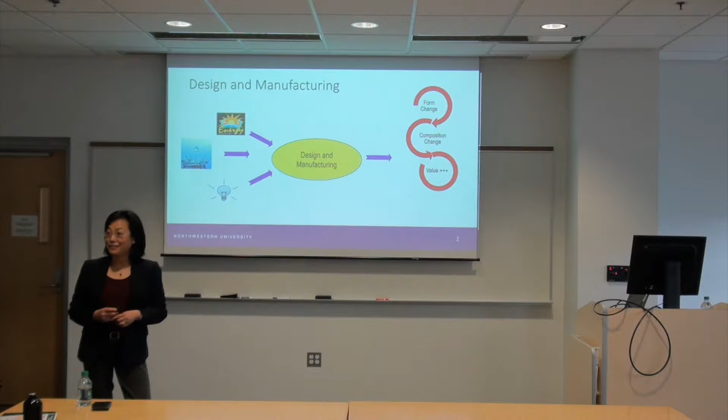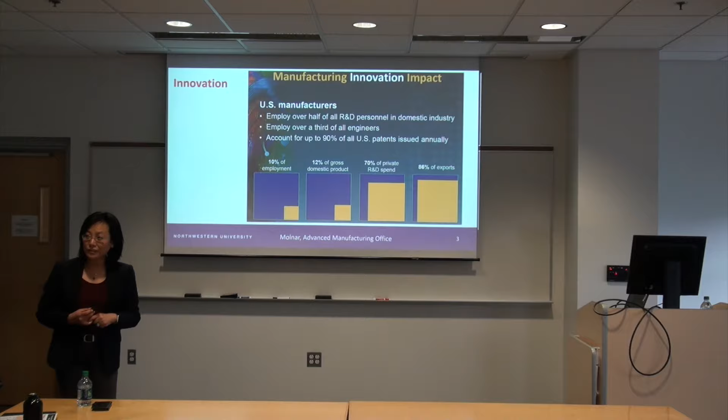If you look at, for example, this is from the Advanced Manufacturing Office—a lot of employment, PhD employment, R&D, particularly half of that is in the manufacturing sectors. So for this crowd, I don't think we need to emphasize too much—everyone understands the importance of that.

In our lab, it's co-directed by me and also my colleague Kornel Ehmann. We have three strategic areas.

One is looking at flexible fabrication processes. The second is quite some work looking at scalable manufacturing processes for surface engineering. And the third is digital manufacturing cyber-physical systems.

Each of those three requires a little bit different in terms of students' background. For flexible manufacturing, let's talk a bit faster. What we're doing—a lot of work I'll talk about today—is looking at double-sided incremental forming process, which is a dieless forming process to make sheet products. Associated with that, we also have electric-assisted ones to enhance the formability of the metals.

The second category where you look at flexible manufacturing processes is, obviously, additive manufacturing. Here we made our own instrumentation called the additive rapid prototyping instrument. It has very little resemblance to commercial ones, because we want to tap into the system such that we can change the control, change the flow rate, change the laser power, and monitor that, as well as do in situ metrology.

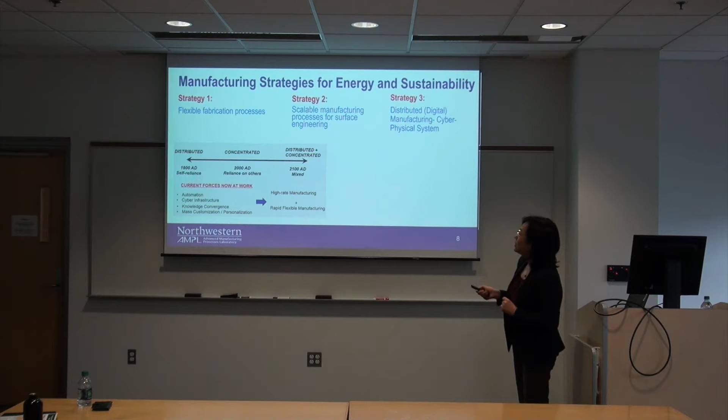Going to the future, particularly with additive manufacturing coming in and many other flexible manufacturing processes, smart robots coming in, the mixture is going to be high-rate manufacturing plus rapid flexible manufacturing, what we call it. We actually wrote this paper quite a few years ago, before distributed manufacturing became a concept adopted by the majority of people. Now when you talk to, for example, DoD, they are really looking into the distributed manufacturing model, and how do you connect these different things together.

One of the projects we're working on, also with Champaign colleagues, is thinking about all these different capabilities, and how we create a kind of internet to bring all these different resources together. You can also manage the servers, do routing optimization, and put everyone on the same platform. So when you have small businesses here and there, how do you get their extra manufacturing capability onto the same platform, where you can also do certification and resource management? That's one aspect of the cyber-physical system.

The other aspect of the cyber-physical system is predictability. When you do computational modeling, how do you know that the part you are making has exactly the quality that you intend?

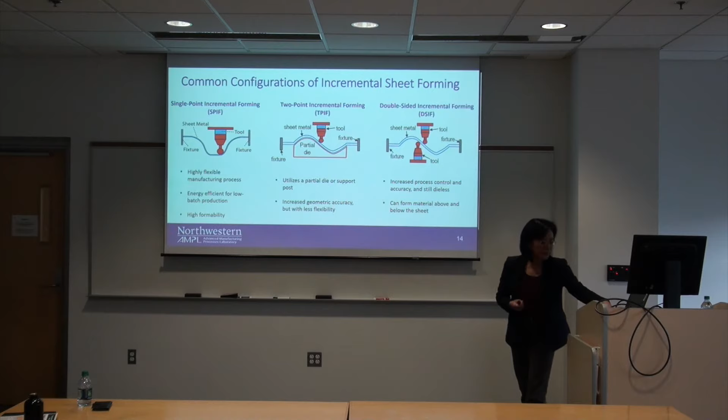Okay, so we have a video, it's on YouTube. Let's see whether it's working. Sorry. I don't know whether the sound is working or not. Maybe I can try that. Maybe it's because of me. Okay, you don't get the sound.

So Neil did a really nice explanation on top of this—another PhD student of mine—so you have to bear with me and just listen to me.

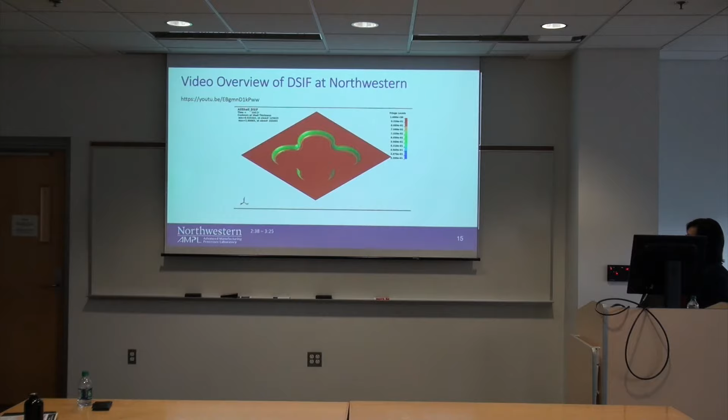Everything looks good, and now we're ready to manufacture the real product. Lubrication is essential to prevent tool wear as well as to achieve an excellent surface finish.

During forming, we monitor the forces of the tool tip, as well as the current progress of the tool path.

Here's our finished part, and a close-up of the surface finish, and a few other parts that we made.

So this is a flange. For more information, check out our website. And thanks for watching.

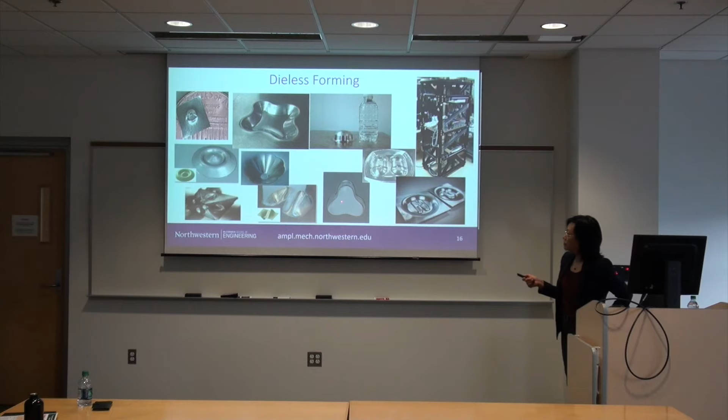So here is a collection of some of the parts that we made, and you can really go dieless. That's our whole concept, and you can also create flanges because many of the sheet metal parts need to generate an assembly for other purposes.

So you can do the laser cutting, and then you can do that. Now the other thing which is difficult is actually generating something like vertical walls and those features. You can scale it up and down, so the smallest one that we made is just the size of a pen.

When you talk to industry, they say geometry accuracy is the number one important part. For people who have worked with metals before, how many of you here have worked with metals before? Okay, all right, just about a third.

The part was formed to be a pyramid part, and as you can see, after it's clamped, it was pretty good. Now we try to take the part outside of the machine, and it becomes what I call a potato chip.

It's a metal potato chip, and this is really inherent because of the spring back, the elastic recovery in the sheet. So after you release the clamp, the part is totally unrecognizable.

How do you solve this problem? The way that we did it: we actually put the part back, assuming the recovery is purely elastic, back into the clamp, and then we went through the thermal annealing process, stress relief.

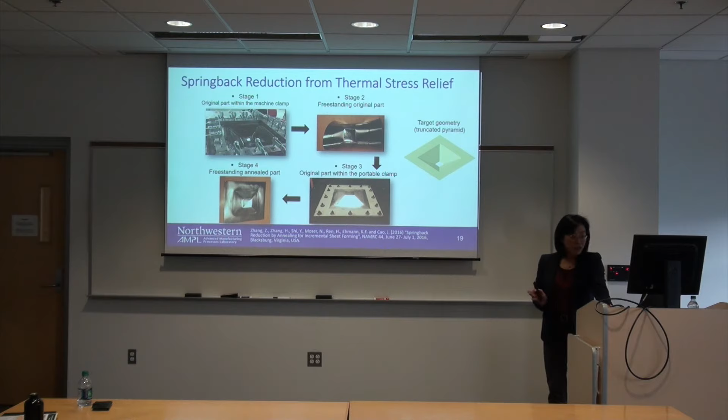And then once you do that, after you take out the part, you see it's pretty good. So we solved that one. Now the goal is, these are the different ways you can try to get to the right temperature for thermal annealing.

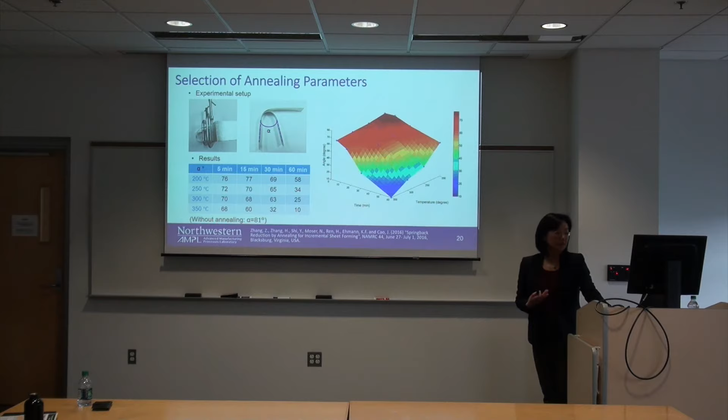That's not that difficult, because if we just assume it's purely through the bending process, you can actually get those parameters pretty easily for different materials.

But then the key part is during forming, you need to form to the right geometry. In the video you've seen with the DSIF, you actually have two tools, one top, one bottom. That's a simulation model, right?

And then you go from the top and gradually move down. The tool each time moves a delta Z going down, gradually moving down, and you see the part gets deeper and deeper.

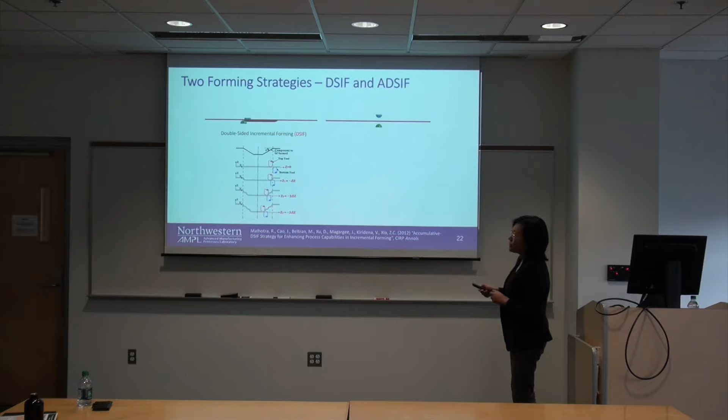Now the problem with this is that you have local deformation, and what happens is when you have a force acting on the part right here, the previous part that you made is also subject to a force, so you stretch it a little bit.

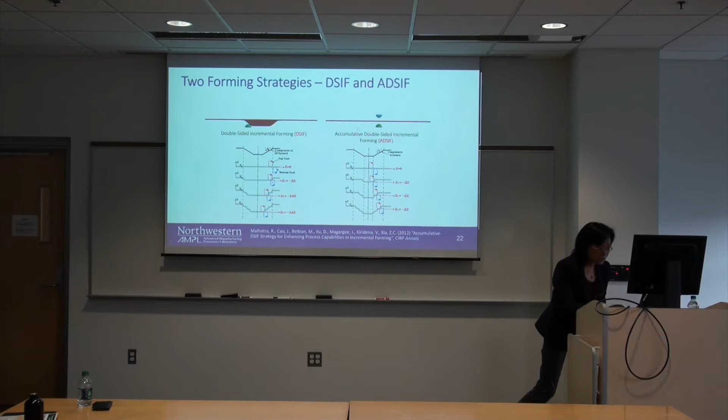For simple geometry, it's easy, but if you have a complex geometry, it could get tilted or deformed some other way. So the process that we actually developed here is really interesting.

Instead of going from outside to inside, this process starts from inside and then pushes the tool towards the outside. You see that the tool always stays on top of the clamp and never moves down, while the part actually gets deeper and deeper.

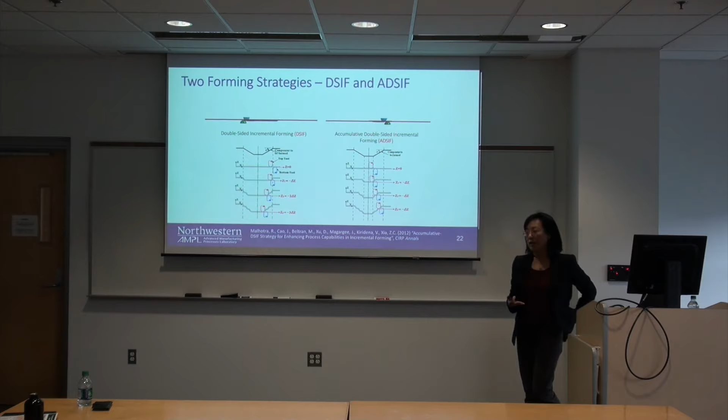You see that? This is interesting because now you have local deformation happening right here. And because I'm always working with virgin material, which has not been work hardened, I can have better control over the displacement because all these material properties are kind of consistent, and then I can go there.

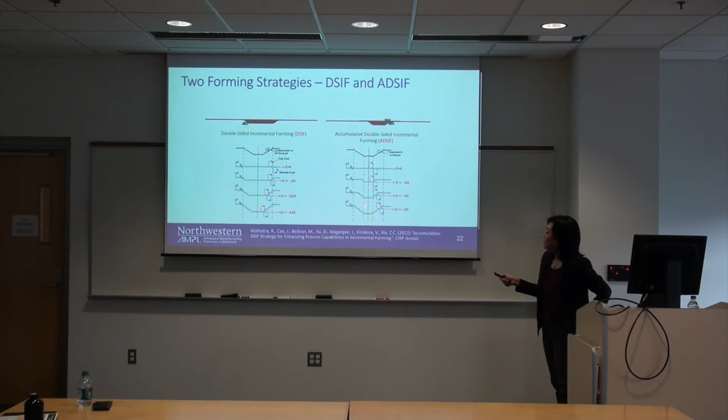So nevertheless, if you look at the plot, when we look at the shape deviation versus, for example, different squeeze factors between the tools, it's a kind of busy plot, but bear with me and let me explain. This is shape deviation in millimeters. Let's just take a look at this red one.

Forget about squeeze factor, we're not going to talk about that. But just look at the square ones.

The gray one right here is the DSIF, which is a traditional one - our group actually started this - when you have the outside going to the inside, with delta Z about 100 micron. And this is a part that we made. If you compare the part, it's not just a simple part, but actually has features in there. The average shape deviation is about 3 millimeters if you do that process.

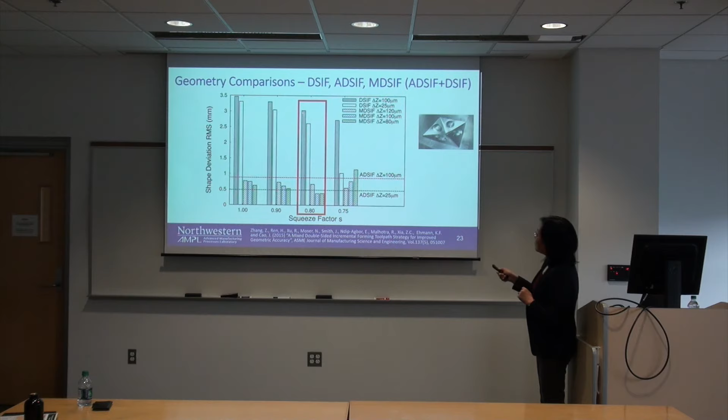Now you can change the delta T to be 25 micron, and then you can reduce the shape deviation.

Now if you do ADSIF, from inside to outside, with the tool always at the normal, the initial clamping position, the delta T is 100 micron, you have shape deviation just below 1 millimeter. If you go even better, with say 25 micron, you can go very low, about 0.5 millimeter, which the industry starts to take as okay. They actually want probably even less than that, 0.2 millimeter. So if you go even lower, this starts getting ridiculous - 25 micron, if you get even lower, it takes forever to make it.

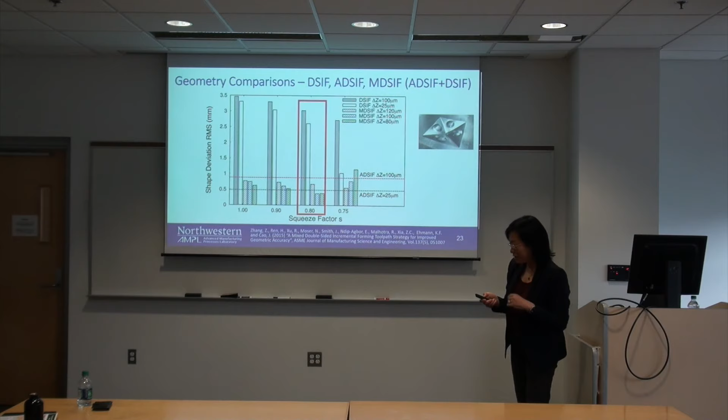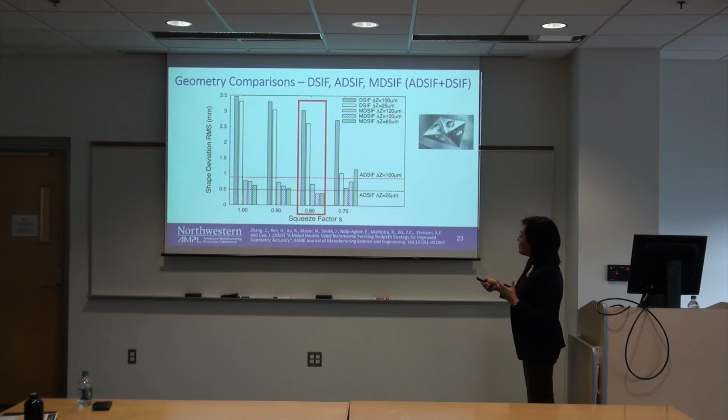But the process - you see there are two additional bars right here. What we did is we call it MDSIF, mixed double-side incremental forming. We used a delta Z as 100 micron. We do ADSIF first, basically from inside to outside first. Then the second time we still use a delta Z as 100 micron from outside to inside again. You can think about the machining process - coarse machining and fine machining, or shaping - similar concept. So with this one, even though we do it twice, which means the time needed for the mixed one is about twice as much, but still it's about half of the other, and we can get better geometric accuracy.

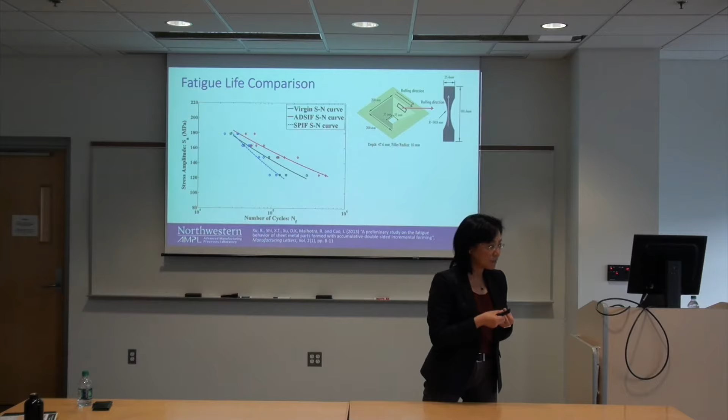We actually have a paper on this, which I didn't include, but nevertheless what you can imagine is here you actually have local voids developed, and fatigue is very sensitive to voids. That's when you have this kind of reduced fatigue behavior. Now with the ADSI, because you are putting the compressive stress through the thickness, you're closing those voids and that helps get a longer, better fatigue behavior.

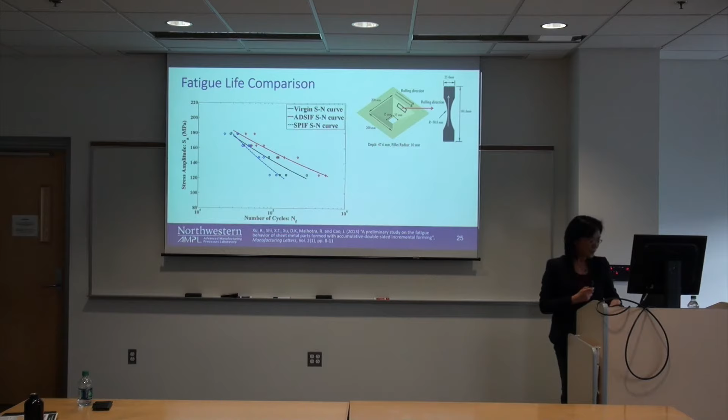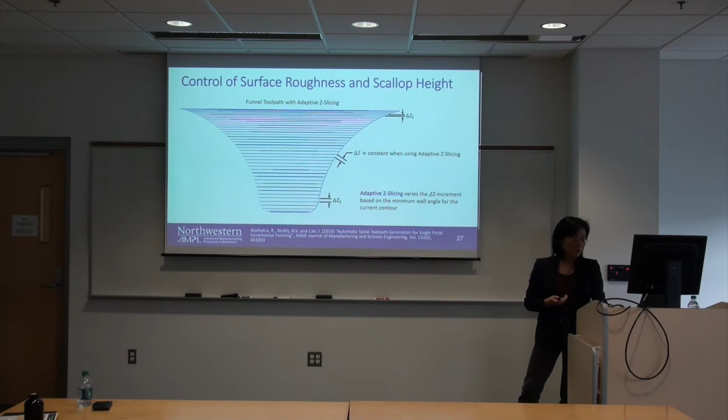So surface finish is another issue, and you can solve it kind of using an engineering method. Basically, one way is when you do the delta T, you can adjust that based on the local curvature. Looking at the machining process, it's a very similar idea. You have two scallop tools coming together, and that generates the roughness. So you can actually get it pretty smooth if you do this variable approach, and you can also reduce the forming time.

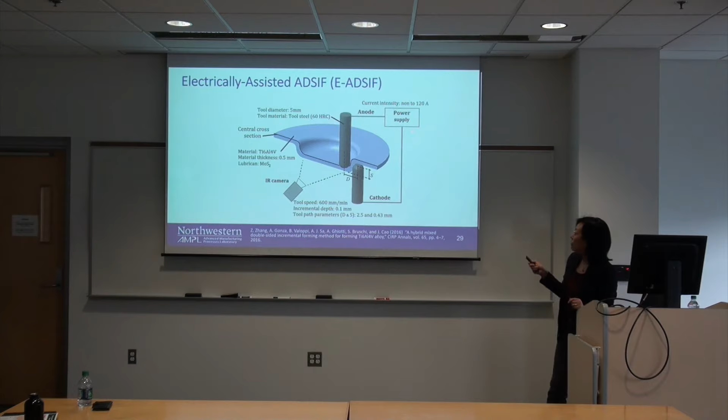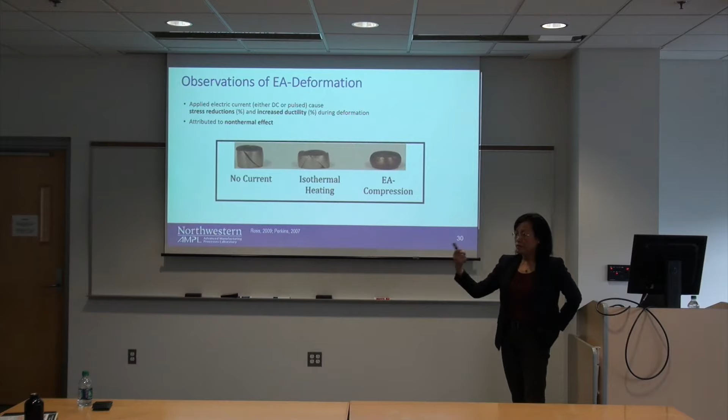Now, let's think about how we can prove or disprove this. One thing that's different when you look at these two tests: the EA test is instantaneous because the Joule heating is instantaneous, while the isothermal heating requires putting the sample into the furnace for a while before you can do it.

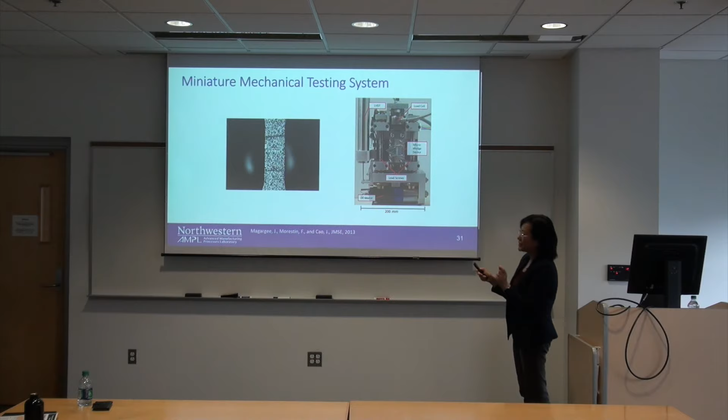So for my experiment, we developed a very small, tiny tensile machine right here. This is really the size, 200 millimeters. Our sample width is only about 1 to 1.2 millimeters. And there's a DIC, of course, so even with such a small sample, you can actually get the strain field.

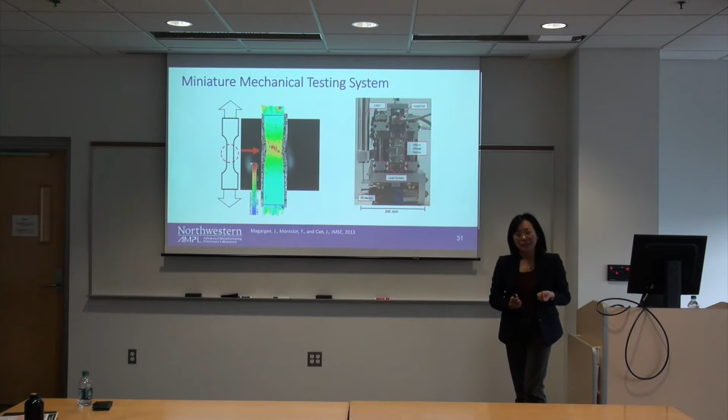The idea is, because the EA happens instantaneously in electro-assisted forming, we wanted to compare whether there's an additional EA contribution or not, but also take the time factor out of the equation. So what we do is put in a tensile specimen and pass electric current through it. Meanwhile, instead of comparing it to high temperature in a furnace, we use an air nozzle to blow air onto the specimen. Remember, our specimen is very small, so it reaches uniform temperature almost instantaneously.

You can adjust the airflow temperature, even cool it down, even go higher, but there's a limit, about 180 degrees, and that's it. Nevertheless, what we could do is compare the samples with the air current or without. So here are the results.

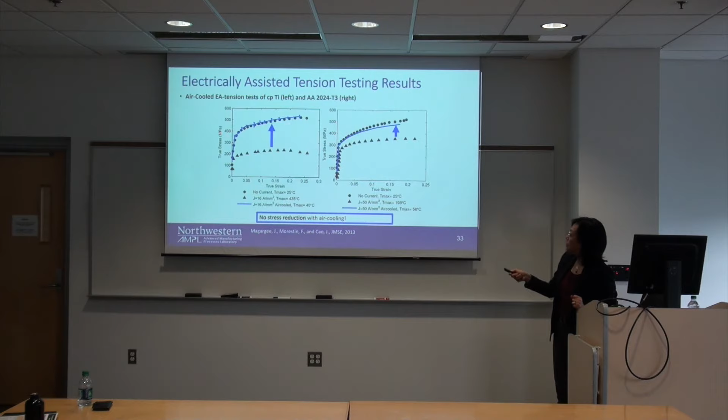So our conclusion is that most of this is still thermal, the Joule heating effect, and not so much the athermal effect, because if you pass a current and the temperature is the same, the results are about the same. Now, knowing that is important because we can use it very effectively in our modeling.

So knowing this is purely Joule heating, you can actually use well-established equations to find out the delta T if you add the thermal effect and the electric current density, and then calculate what the temperature increase is going to be for different material systems.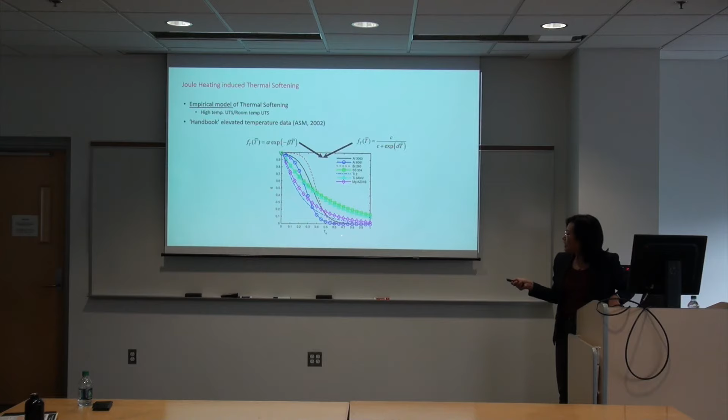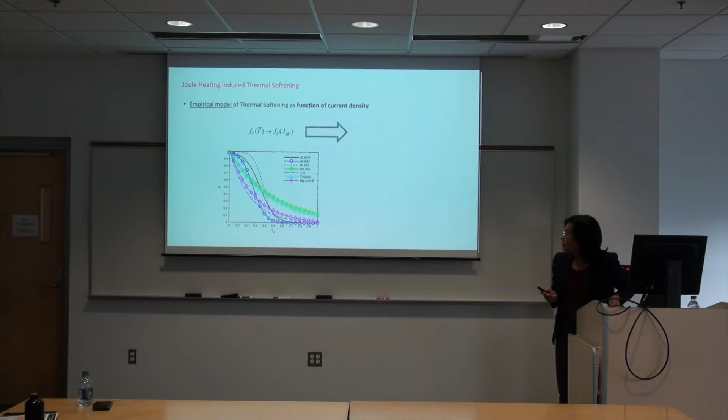So when you combine these two together, depending on the temperature flow profile and the reduction, I can tell how much current density I'm putting in and what the amount of flow stress reduction is. You can compute this analytically using existing data.

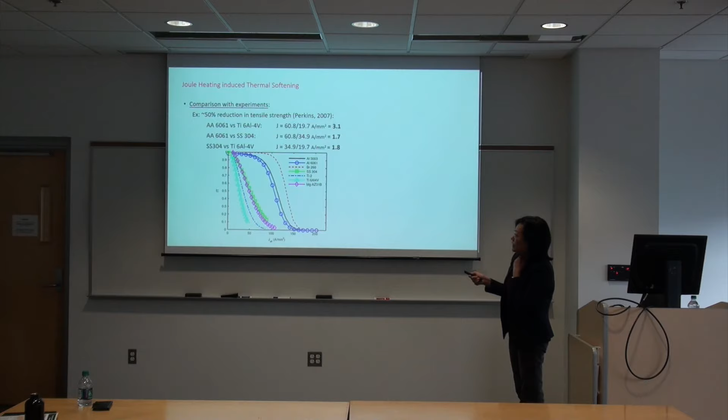What's important is that in the literature, people wonder why they call it the so-called threshold current density. For some material, like aluminum, almost nothing happens, but then eventually after this threshold, there's a sudden drop in flow stress. People wondered why, and for some material like titanium you don't see that much. But when you put this model all together, you can see clearly what's happening right there.

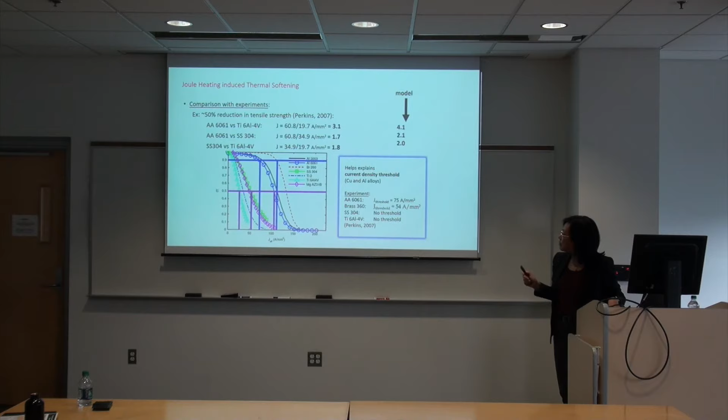And then we compare to the experimental data, and it's close enough from the first order approximation. So now with that, going back to the incremental forming.

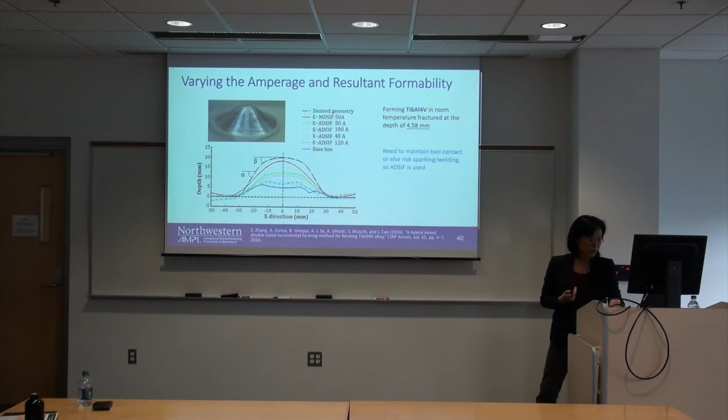Titanium is very hard to form. So we just want to form a dome. If you use baseline room temperature, it fractures right there. Then we put the current in, and you see we are getting better and better, and you can actually start to work on the product material.

Okay. So going back, I probably have an additional 7 minutes, right? How much time do I have? A little more than that, but yeah.

The other thing with the DSIF, remember we have two sides. For people here with a control background, I have to show this. So you have two sides coming in with the control.

One interesting thing is that this almost happened by accident, because we tried to make the funnel shape. One side looks perfectly fine, and the other side has fracture. When we look at the part, it's really not that symmetric, even though we put symmetric commands into the system. So on the front end, you see the nice shiny part where the tool has been in contact. But on the back side, it's not - the contact line is right here, and this is fracture.

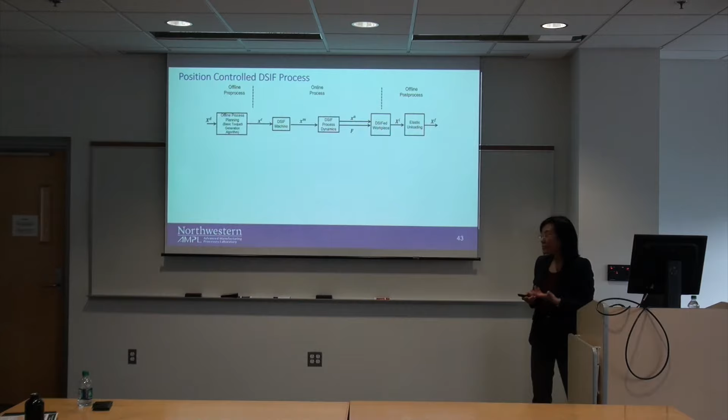Remember, I also talked about what happened right there - you degrade from double-side incremental forming to single-side incremental forming, where basically only one tool is on top. So our hypothesis is that if we can maintain the contact, we will be able to delay the fracture.

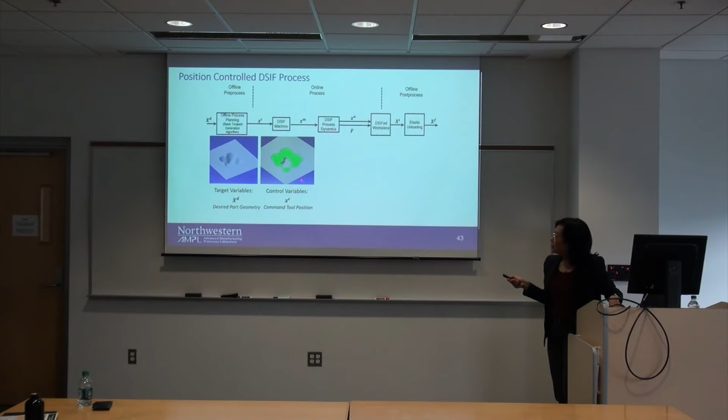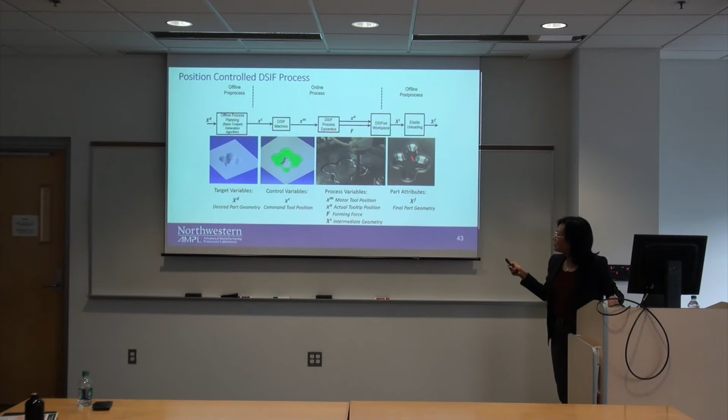Now, this is our hypothesis, and you have to work with the system. One way to do that is because there's the target trajectory, and then the command trajectory that we change to the tool position. When you go into the machine, there's a motor that controls the position, which could be different. And the tool itself is also an elastic component - it could have some deflections. So the system also has a compliance issue right there, so the formed part is obviously not the same as the previous one.

So one way to address this is offline compensation - you say, okay, what's the difference, and then compensate that way, depending on the tool gap that I've commanded. But that's not so good. It gives us some good results, but we want to do real-time process control. So let's first check whether the offline compensation will work or not.

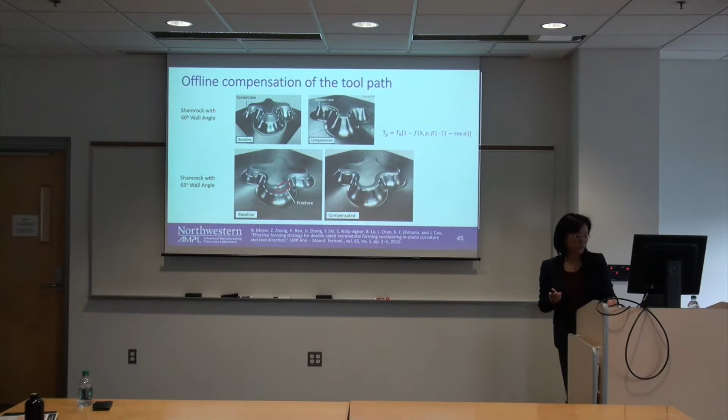And then once we put the contact line up, yeah, it does work, right? So you see that, you create a fracture right here, but then once you fully compensated, it was good. So knowing that, the next step is really, how do you do the real-time control to make sure that everything is going to be contacted?

This actually just shows you most of the contact mechanics right there. Okay, so skip that.

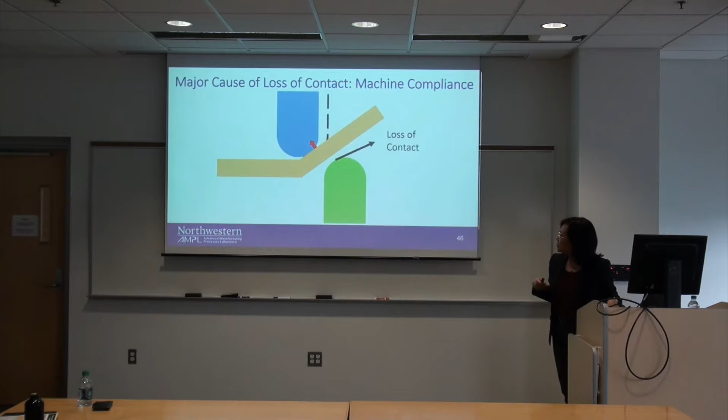So we want to do the online control. The key thing is actually the compliance. We think the compliance actually creates the most problems. And then you create the compliance and then you feedback. So the model, the controller is actually pretty easy.

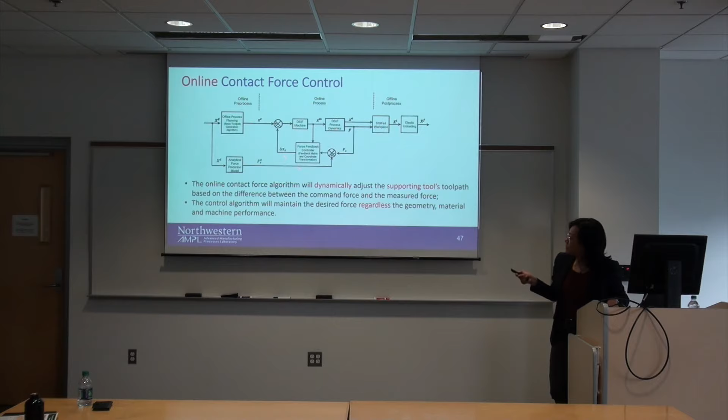We use a traditional proportional integral controller. Nevertheless, to identify the compliance is something that we worked on. After that, we use force control in the radial direction, and that gives us the contact. So now we don't have to look at this real-time, offline compensation. Now we can really do the real-time and also look for different geometries.

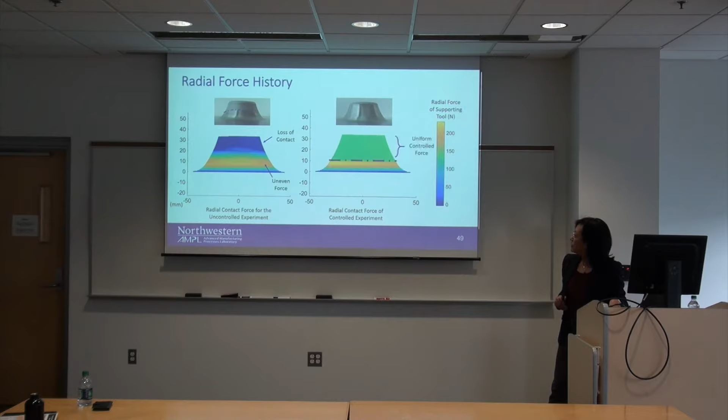Finally, talking about the machine, you saw the movie, and this is something that we have been working on to get the larger one. In terms of future research needs, some of the additional ones that's happening right now.

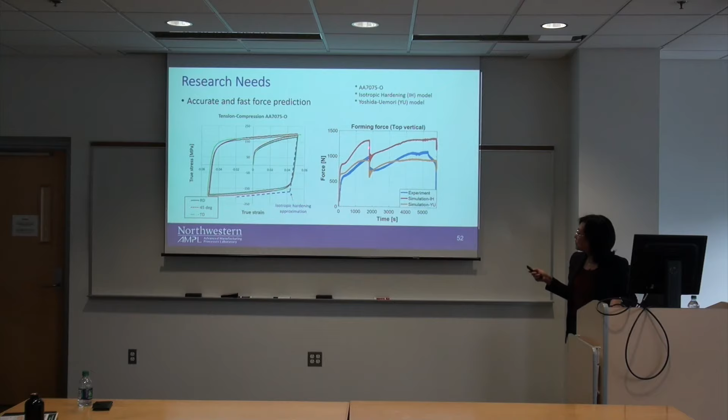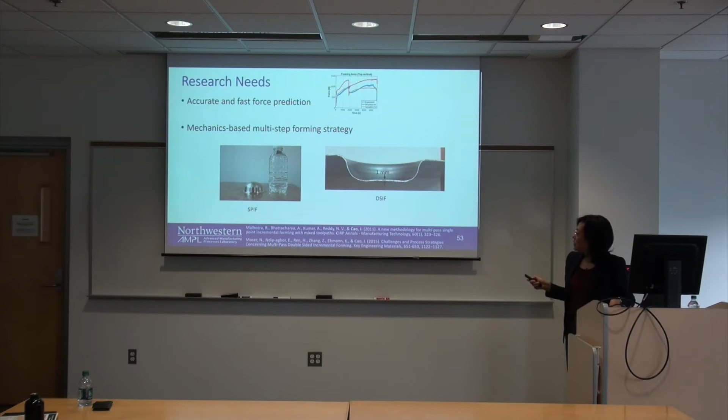The other thing which is important is actually how do you do this very sharp, deep, straight wall part, and then the unevenness of the thickness distribution. So that's some additional work that's needed.

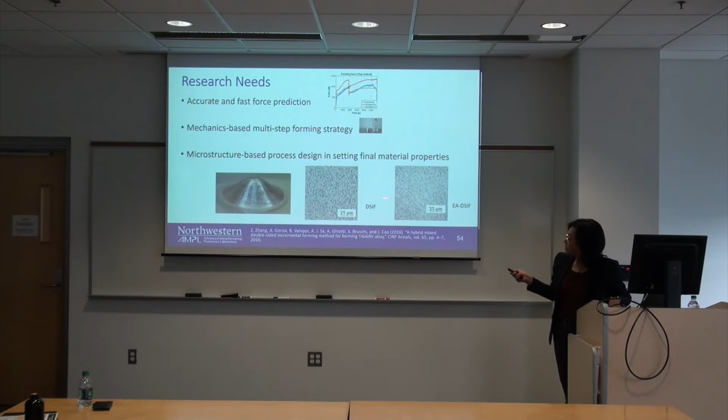Microstructure-wise, which is good, when we look at the EBSD, it actually doesn't change that much for the microstructure. The other thing, as I said, no option is the best option. If you go to the shop and there are too many options, I get lost. So no option is the best one.

I want to have the turnkey solutions so that everyone can use it. And one of the things is the toolpath generation, which is really fun. Because conventional CAD software doesn't take into account, for example, the local sheet deformation and other stuff.

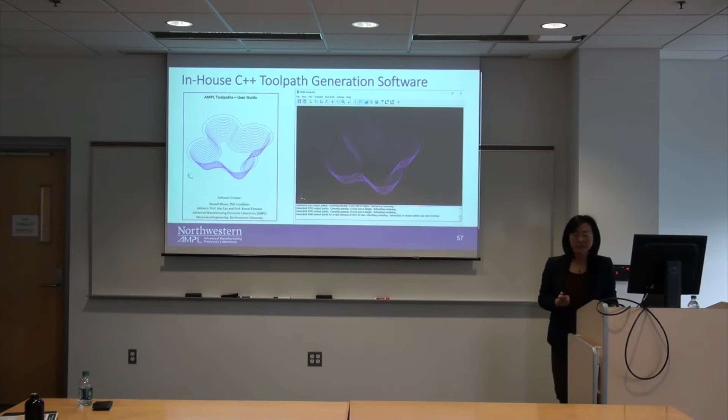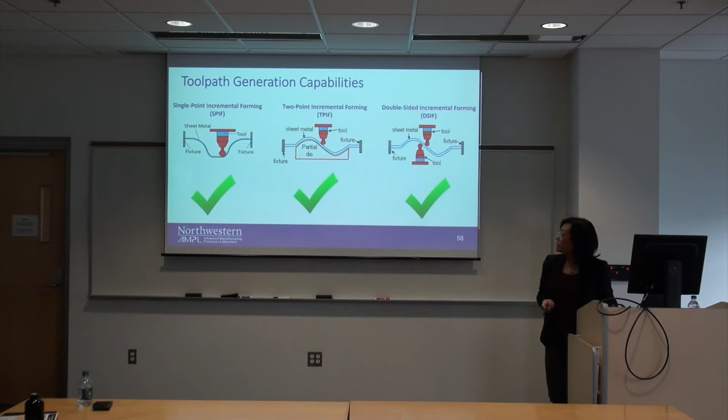So we actually have been developing our own C++ toolpath code to consider these effects. And we have it for all these different modes now. Right now the code is open source, and everyone who's interested, feel free to contact us.